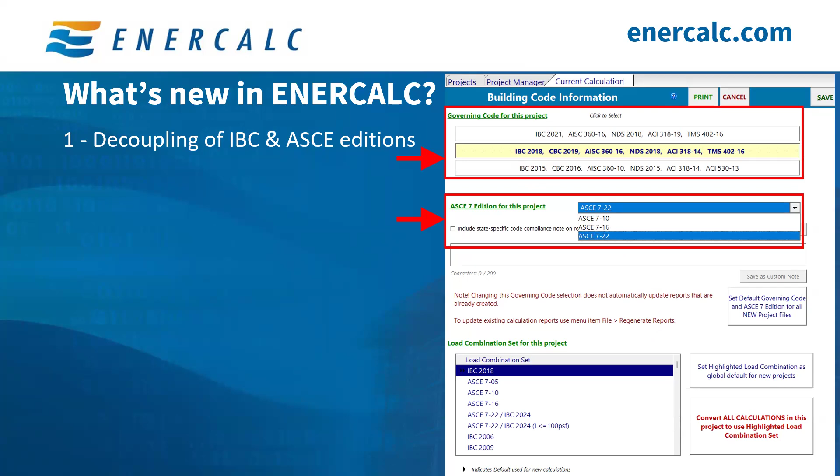The second update is the addition of the new ASCE 7-22 modules. I'm sure y'all have noticed we started with adding 3 new tabs to the calculation menu. The first tab is the seismic loads tab, where we added calculation modules for seismic base shear, seismic wall anchorage, and seismic demand on non-structural components.

The next tab is the wind loads tab, and we added a few more modules, which cover the wind load for the envelope procedure based on Chapter 28, directional procedure based on Chapter 27, and we have a wind enclosure calculator. We are actively working on component and cladding per Chapter 30. It's currently in active development, and whenever it's done, it will be housed under the same wind loads tab in this area. Make sure you keep your eye on all the new updates we release.

The last tab we have here is the other loads tab, and currently it houses a live load reduction calculator, and it houses the snow loads that came out about a month and a half or 2 months ago - that's the ASCE 7-22 snow load module.

Another exciting update is native load linking within ENERCALC. For a few months now, we've had load linking, which gives the user the ability to automatically link reactions from one calculation to another, and change something in one member and have the effects trickle down to all downstream members. This was one of our most requested features from our users, and we're excited to say we support it for wood beams, and it's ready for you to use.

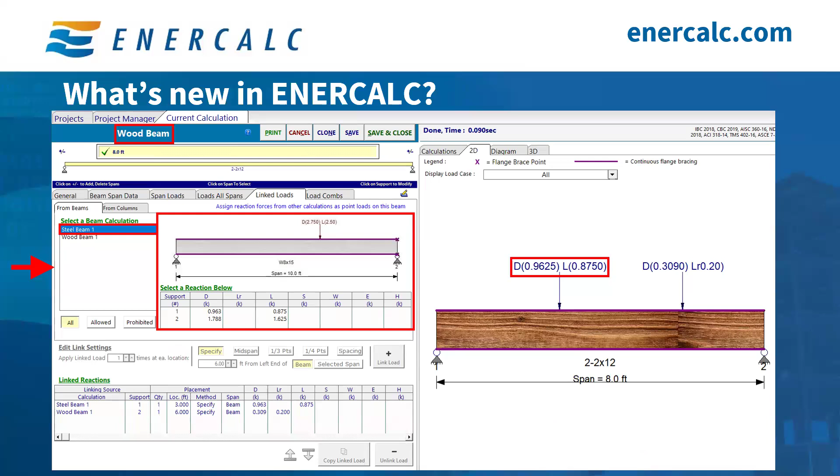The user still has all of the same capabilities in terms of linked load or linked reactions placement. You can grab whatever load you want and put it at a specific location, or maybe at mid-span or third points.

All of the various options that were available in the steel beam are also available in the wood beam. The standard load linking features are still functional after wood beam integration. We still have the calc order, and now it looks into steel beams and wood beams and figures out the exact load path, and it follows that load path properly, so there's no issues with the load path logic, and all calculations are performed in the load path order.

At the bottom, you can still see the load linking status badges. These apply as well to steel beams and wood beams. So this way you'll know if anything changes, it'll turn from green to yellow or maybe from green to red based on the type of change and the type of warning status or information we're trying to convey.

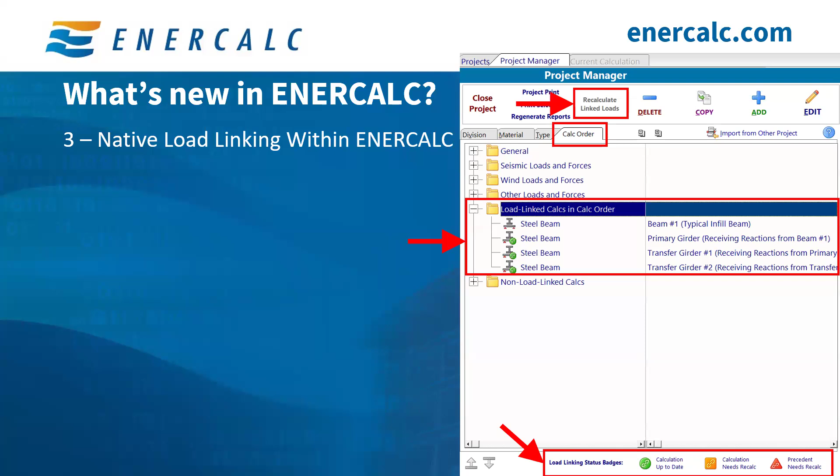And of course, at the very top, you'll still find the Recalculate Linked Loads button, which allows you to bulk recalculate all of your calculations at once to ensure that the most up-to-date reactions are being used and their effects are trickling down to all of the downstream members.

Overall, load linking is an even more powerful tool now than it was before with just steel beams. It allows our engineers to create a well-connected chain of calculations to minimize the risk of transcription errors. And now that we support wood beams in addition to steel beams, with more to come, the sky's the limit.

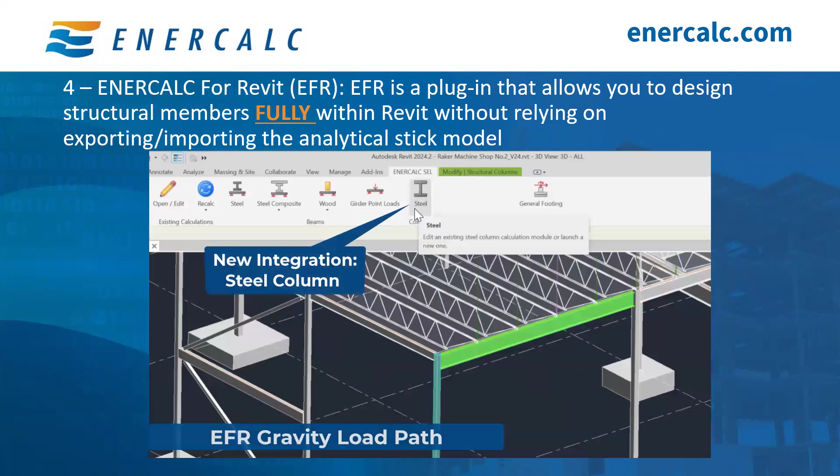The last item we want to highlight before we get into our 2D frame module is our ENERCALC for Revit. ENERCALC for Revit is a Revit plugin that allows you to design structural members fully within Revit without having to export information to another calculation software. It's really a simple point-and-click workflow that allows you to design a member in a fraction of the time it would take otherwise.

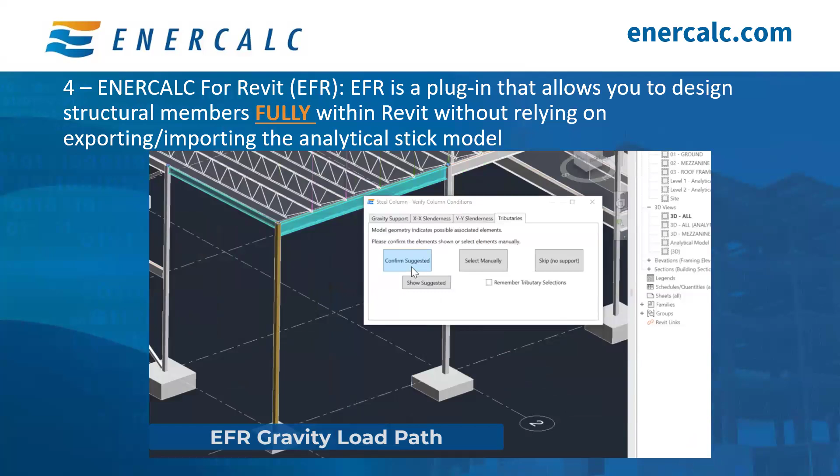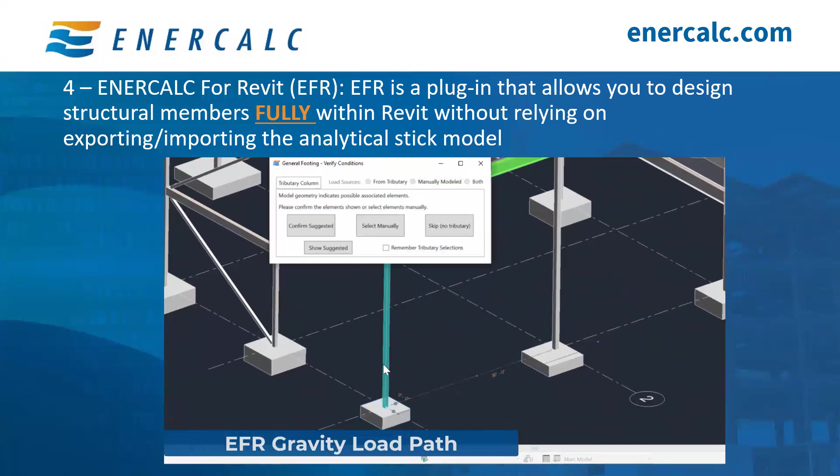You just click on the member and follow the guided prompts that we have there, and before you know it, you have wrapped up your design and you're done with it. It's really that easy. And the same process, because a lot of people ask this question, is not just for framing members, but also for foundations. All you have to do is point and click, and a foundation calculation will be generated automatically for you with all of the load takedown from the columns and all the framing members.

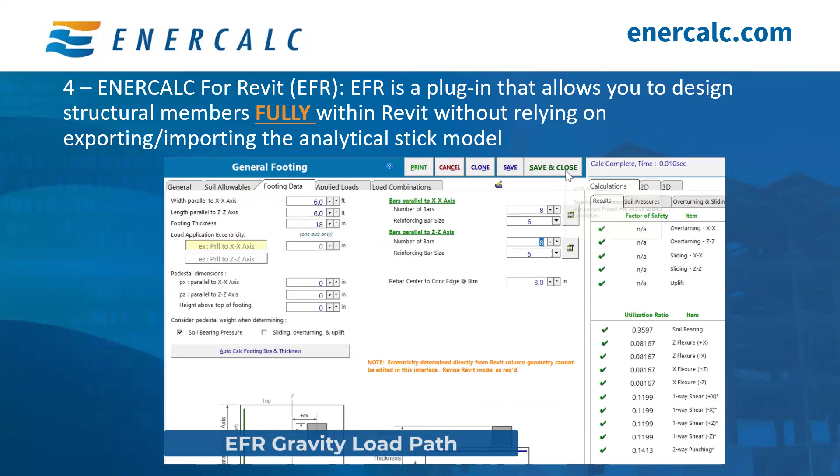Currently EFR supports the design of steel beams, composite beams, wood beams, steel columns, and foundations, so you now have a full gravity load path, with more integrations to come.

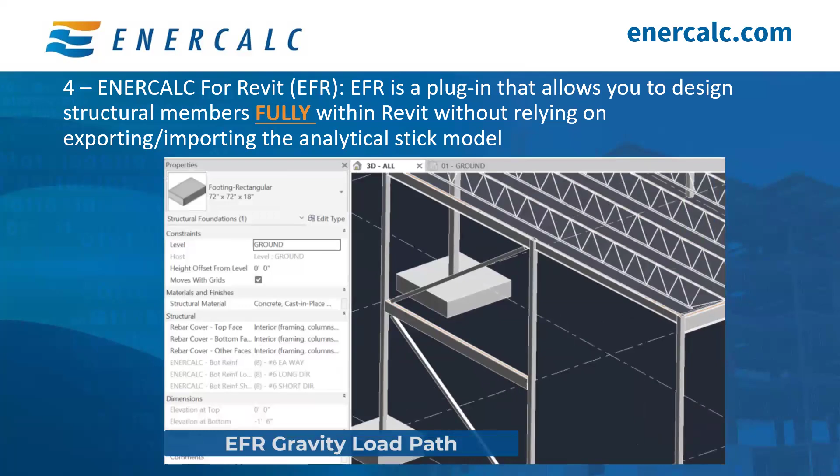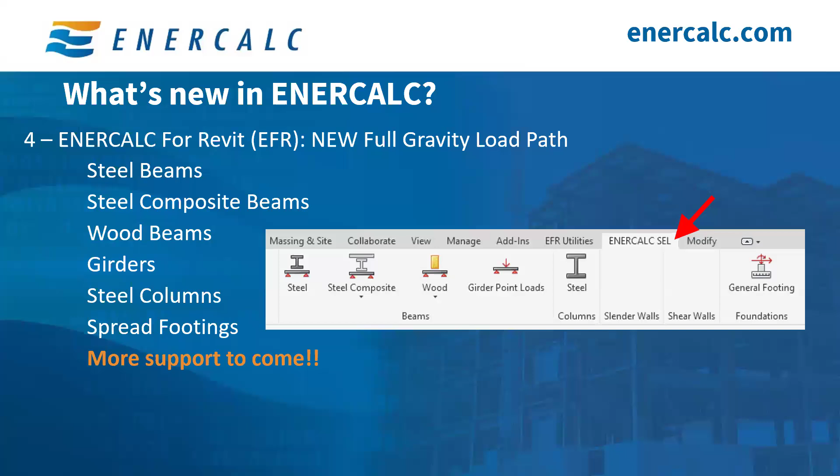Once you have the ENERCALC for Revit plugin installed, it will appear inside of your Revit ribbon bar, just like any native Revit option. ENERCALC is an authorized Autodesk developer, so EFR is designed to play nice and interop with Revit. That contributes significantly to the dynamic and seamless integration between the two products because they communicate back and forth in real time instead of relying on outdated methods of manually exporting and importing analytical stick models.

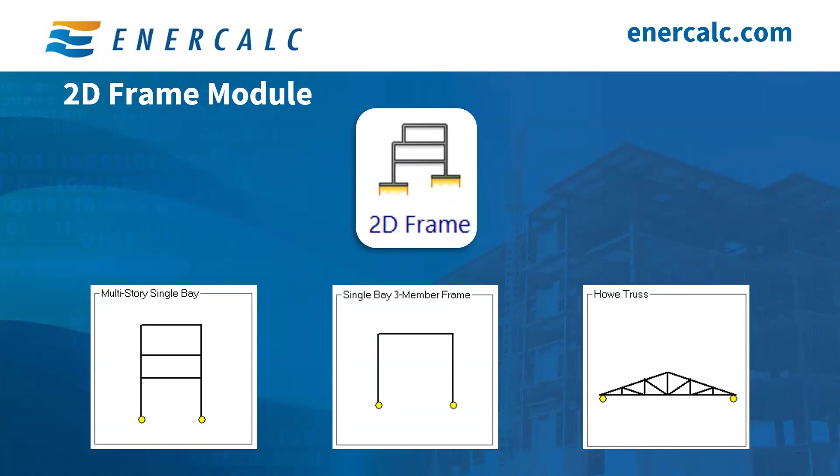So moving on, the focus of our session today is the design of 2D frames in ENERCALC. This includes a variety of planar frames such as trusses, single-story or multi-story frames. Many buildings do not require full 3D design and analysis, and this 2D frame module is a very useful and powerful tool for ENERCALC users to analyze trusses, or the one-off moment frames or knee brace frames they might have, where they don't need to model a full building but still want robust analysis and design capabilities for a lateral system or a uniquely shaped truss. So here's a quick overview of the capabilities and features of the 2D frame.

It performs analysis and design of steel and wood members. It has a frame wizard that helps you with the initial setup of your frame or truss geometry. You get full control over joints as well as member end fixity conditions. You can apply loads to members as well as joints. There are dynamic 2D sketches that respond to the member or joint selected, so if you select a joint it will light up, or if you select a member it will light up in the model, creating a dynamic visual correlation between what you see and what you're clicking on.

Results are extensive. You get a variety of things, but the one I want to highlight is joint displacement, member forces, and stress checks. You also get axial, shear, moment, and deflection diagrams for each member, and 2D sketches displaying deformed and undeformed structures for visual checks.

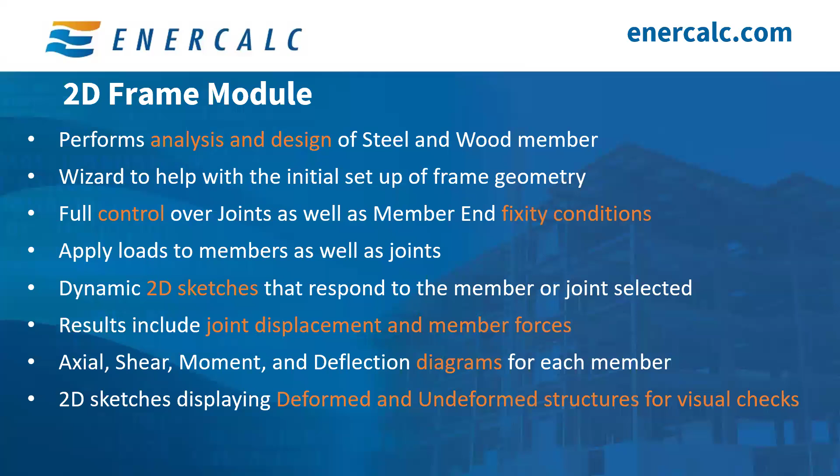So we're going to do a simple example of a moment frame and work our way through it to give you a good idea of what we're working with. In today's example, and this is a very common thing that engineers design, especially whether it's a wood building that has a lot of glass and you need to fortify it with some sort of moment frame, or even a regular steel building, we get these all the time.

So we want to design a moment frame that is 15 feet tall and 10 feet wide. We're planning on using an 8x8 column and a W14 by 22 beam. The base is pinned, and the beam to column connections are fixed. So it's a moment frame pinned at the bottom and fixed at the top. We have a lateral point load on the frame of 7 kips, ultimate, and a gravity load on the beam of 200 PLF. We're trying to keep this simple, but you can do a lot more than what we're doing here. This would just be a simple example that we can dissect and dive into.

To start a new 2D frame calculation, we follow the same familiar process to start any module. You click on the Add button, then click on the Analysis tab, and finally jump to the 2D frame. What's unique about this is that once you click on it, ENERCALC will ask you if you want to use the frame wizard. If you don't have to use the frame wizard, if you click no, you'll just have a clean module where you'll have to draw everything from scratch, including your joints first and the connecting members.

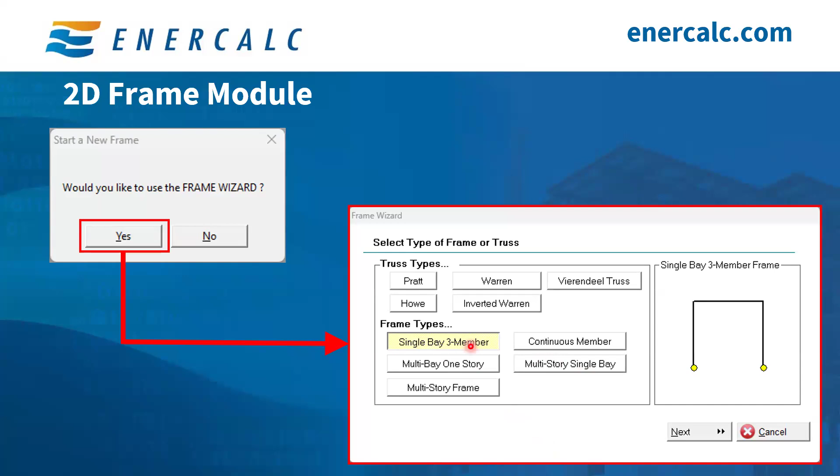That's one story and a single bay moment frame. Again, you can pick whatever you want from here. So for us, we'll just pick this and then click on next.

In this window, we set the frame geometry. So we input the horizontal length, which is 10 feet from our example, and we put the frame height, which is 15 feet. Moving on, this is very intuitive.

We pick the member sizes that we want to use. You have here the steel library and the wood library. For us, we just click on this right here, and that pulls up the AISC section library. We pick the 8x8 by 3/8, and then we do the same thing here where we pick the W14 by 22. If you picked on wood, then of course you'll get the NDS wood section library, 2x4s and all the various things that you can use.

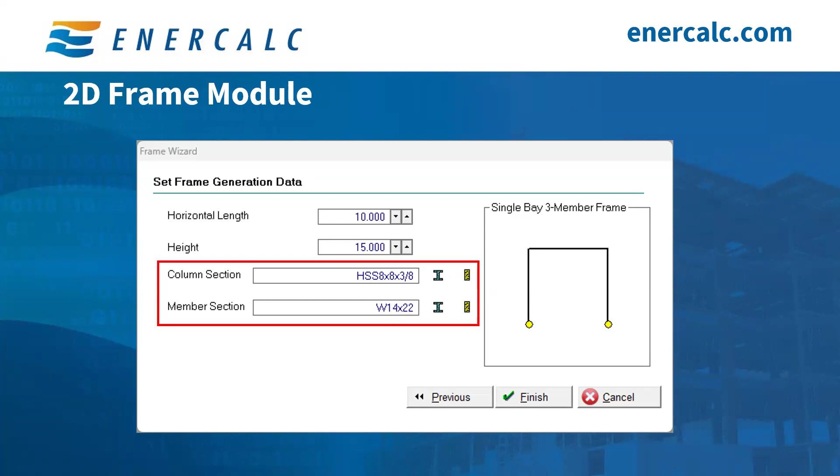That's typically something that I would do if I'm working on a truss, but not for typical moment frames that would be steel. Anyways, once you're done with all of this, you click on finish.

And the frame wizard will take, I don't know, 10 to 15 seconds to just auto-generate the frame for you so you can get started.

So the layout of this module is slightly different. You can see we have a lot of buttons on the left, on the top here, a lot of tabs, more than what we're normally accustomed to in the other modules. Because of the versatility and all of the options and results that you get, we had to jam pack it a little bit with tabs, but it's a very simple process to go through it from left to right.

Starting with the general tab, that's the easiest place to start always. You have right here the description, so we'll just put 2D moment frame. And I'm saying here that it's pinned at the base, because that's what we want to do.

Next, you get a summary. This is something that I typically look at the very end. It's a summary about your current frame. It tells you the total number of joints, total number of members, how many joint loads are applied, how many member loads are applied, and all that. So this is more of something you look at the very end, when you want to get some overall information about your frame. That would be the place to do it.

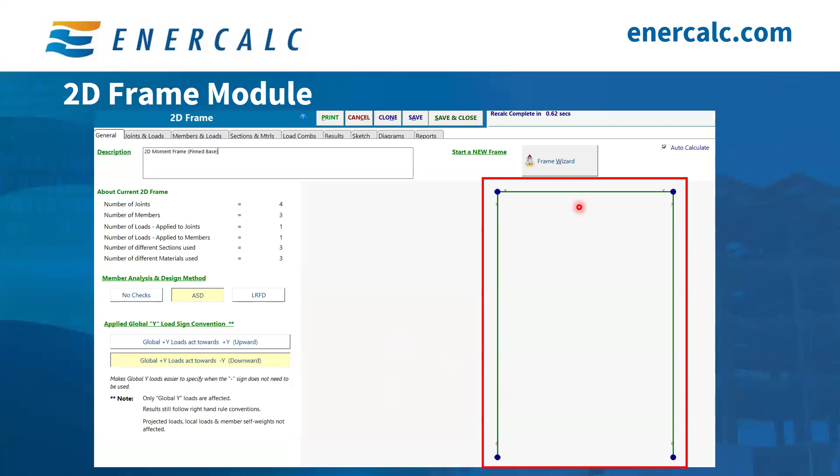That's all there is to it. So anyways, I picked this option right here, which is very intuitive. On the right-hand side, we get this sketch stick frame to help us visualize what we modeled so far, which makes sense. That's all we need is just these three sticks.

So moving on to joints and loads. Under this tab, we have three other subtabs: joint data, joint loads, and joint results. So we start with the joint data. You can see on the left, we have all of the 4 joints and their X and Y locations. That would be right here, all of your 4 joints, and that's all their locations.

You can order these joints however you want. Currently, I have them ordered based on the label, so the joint label is 1, 2, 3, 4. If you click on X or Y or restraint, they will get reordered, whether it's ascending or descending order, based on that. So if you want the X, then they do it based on the X. I like to just keep this simple and keep them ordered based on the joint label. That's the easiest way to go about it for me.

And of course, right here, at any given moment, you always have the ability to model more stuff. If you want an additional joint, you can. If you want an additional member, you can. If you want to delete a particular joint, you can. So there's that capability as you go through the whole process.

Also on the right-hand side, you can see that we have 2 options: joint sketch or full frame sketch. Currently, this is the full frame sketch where I get to see the whole thing, and because I clicked on joint 2, it's highlighted right here. Now, if I click on joint sketch, that's the next option - this is what it's going to look like. It will just show me that joint by itself, and it will only show the members framing into it, with a label. So member A frames into it, member B frames into it, and it doesn't show me anything else. I like to see the whole thing.

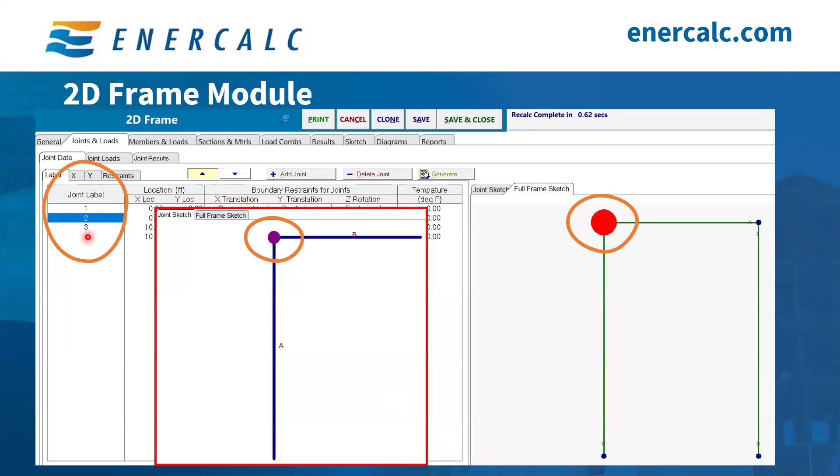It's important to note that in both sketches, the joint that is selected is overly exaggerated to make sure that the user can easily identify that joint. So we click on joint 2 - this one is already large, and this one is super large. That graphical exaggeration is dynamic. So as you click on maybe joint 3, then this one right here will get exaggerated. If you click on joint 4, then it's this one, and so forth.

Lastly, this is the fun part of today's session: boundary restraints for joints. We need to define boundary restraints for joints, and I like to think of these as an external stability and boundary condition. For example, this frame does not have any external restraints that hold it in place except for the foundations. Everything else it can move - if it needs to move, it will move. Nothing else is preventing it from doing so. The only part that's holding this frame in place right now is this foundation on the right-hand side and the foundation on the left-hand side.

So that will be joint 1 and joint 4. What I will do is pick joint 1 and joint 4, and make them fully restrained. To dive into this a little bit, if you look right here, you have the X translation - that means movement in the X direction. X direction is left and right, that's just the horizontal movement, and that's restrained. The Y direction is up and down, and that's also restrained.

The Z rotation - we recently changed the naming here to say rotation instead of just Z, because ENERCALC already knows this is planar analysis. ENERCALC is not confused, it doesn't think about the third axis. That's already out of the issue right now, out of the process, so that's not something we're worried about. This is not meant to represent a third dimension - instead, this is meant to represent the rotation, whether you have moment restrained there or not.

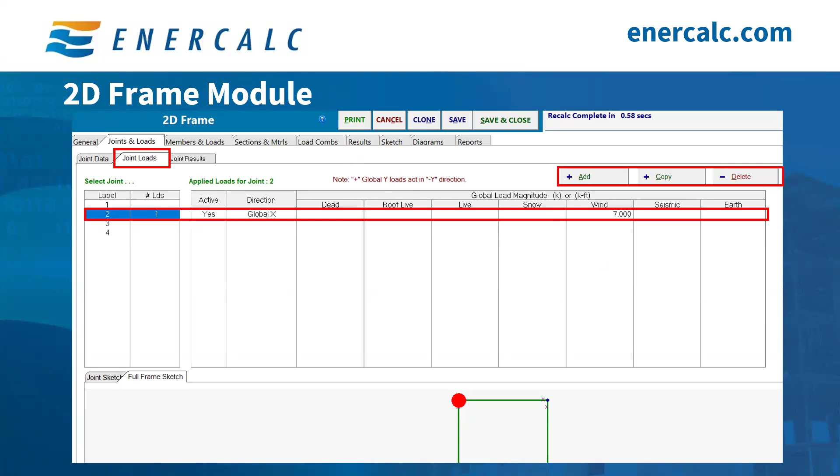Moving on to member loads - it's a similar style. We have member data, member loads, and member forces. This is similar to the joint results; it will have the forces going into each member. So this would be something for us to look into later if we need to.

Starting with member data, you can organize the members based on how you prefer to organize them - that's why we click on these. We're just going to keep them organized based on the member label, and you can see here that they're named A, B, and C.

The bottom right has a dynamic sketch, a dynamic 2D stick frame type of sketch, and if you click on whatever member you want, it will light it up here in orange. So we clicked on member A, then that is member A - this way always making this graphical and visual correlation.

Each member is labeled with the location of the I and J in this middle column. This sketch shows you where joint 1 is and where joint 2 is, and then the table will tell you member A, the I portion is at joint 1 and the J is at joint 2. So we know that the I is down here and the J is up there. This is very critical because now we're about to determine the end member releases, and we want to make sure we understand which end is I and which end is J.

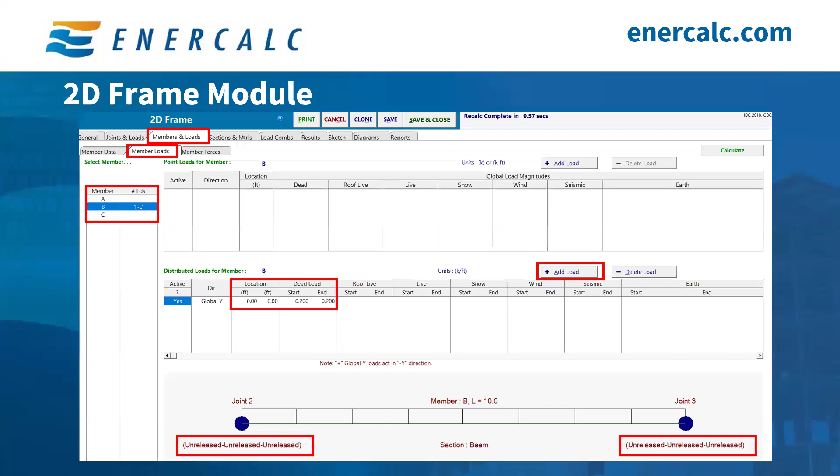And lastly, you can check your member end releases on the sketch. So that's a quick place to review as well. You have the beam member, and this says unreleased on all 3 of them. Again, that's a good place for you to do a triple check that you have the right information.

So moving on to the next tab, that's the sections and materials tab. You can control section data and material data by clicking on the appropriate tab right here. We can start with the section data. Here you can define sections to be used for your design, and of course you can add and delete sections. Currently, we have the HSS 8x8 for columns and W14 for beams.

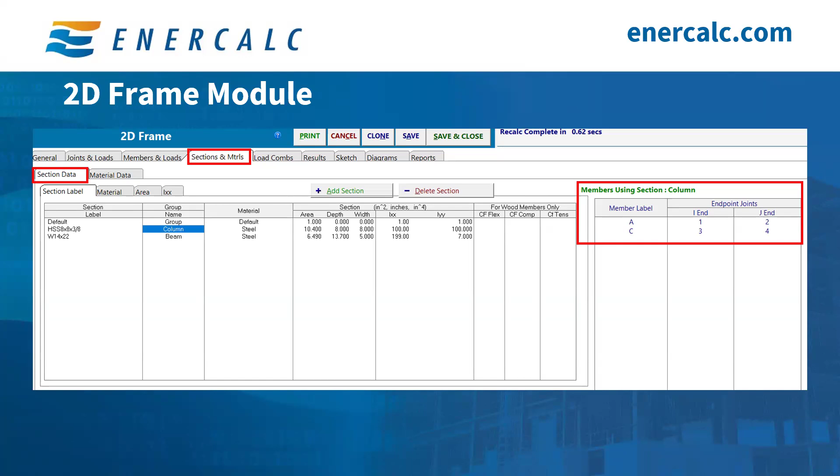If you click on the group name, which is columns for example, this table gets populated with all of the members that belong to that group. That's really handy just to see that everything is done right for you. And if you click on the HSS or the W14, that will open up the AISC library to allow you to change the size if you need to. And of course, you can do this with wood as well, using the NDS library.

The same idea applies at the material data tab. There's steel and wood materials already defined, and you can also add your own general material or delete one as you please. Since wood has different species, you can click on this button and it will take you to the NDS library of materials, so you can choose whatever species you want to use. Additionally, if you click on a particular material, you can see the sections that are associated with it.

So if I click on steel, it automatically tells me, hey, you have these two steel sections. And we can create different steel materials, because this one has an FY of 50. Well, if I have an angle or maybe an HSS, maybe I want a yield strength of 46 or 42, or a pipe maybe 36. So I have the ability to create whatever material I want here and use that based on the member section I'm using and the true FY value of that material.

Once you do all of this, you can jump to the load combinations tab. I won't dive deep into this one since it's a very common tab in almost all of our modules. But the user has a great level of flexibility when it comes to load combinations, and you can control the combinations separately—for strength right here, then for reactions, and for deflection combinations. So you can have these things set up a little differently.

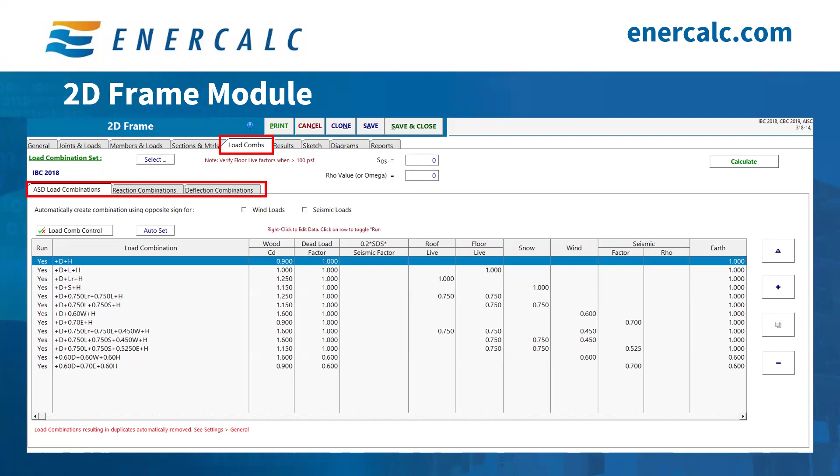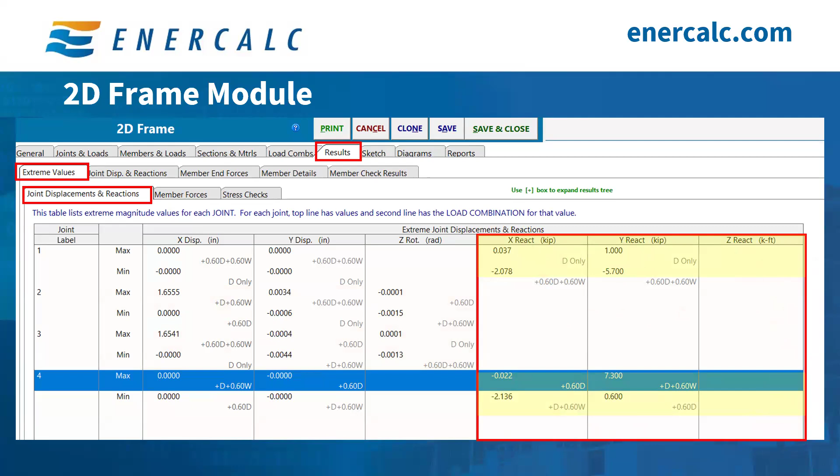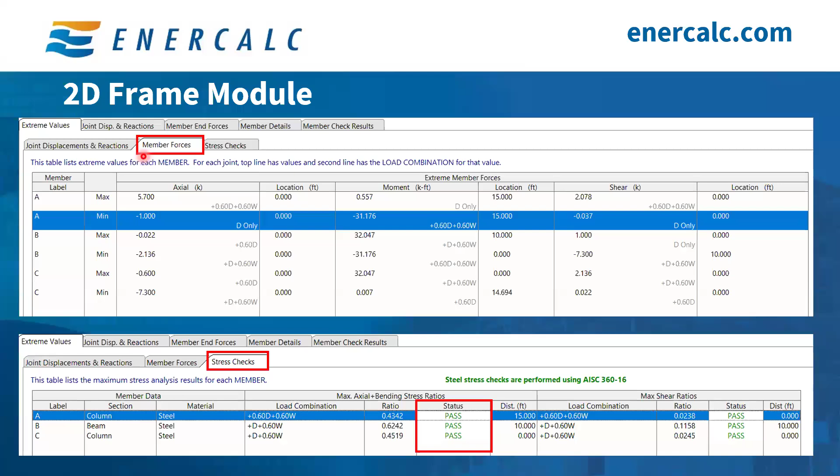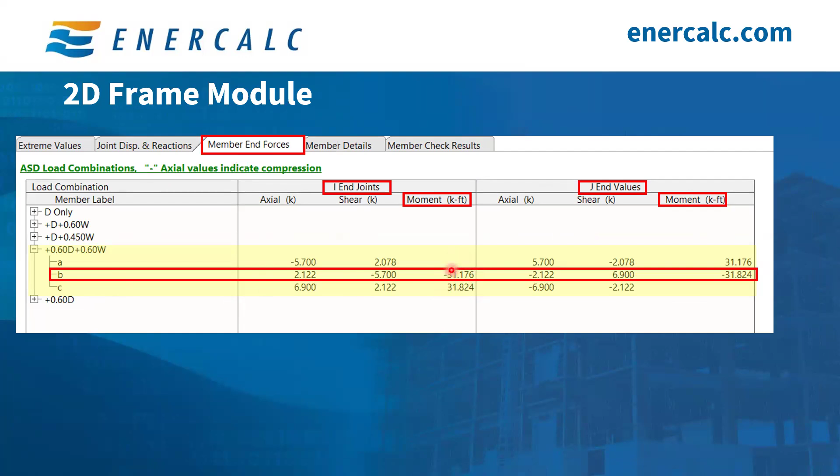So to move on, there's just a lot of information to cover in here, of course. You can click on the extreme values again, member forces, stress checks, and you can see that all of your members are passing, and you can get a lot of incremental results. For a lot of us, whether you're designing your own connections or delegating connections, you can click on the member end forces, and you can see here the moment that's going from the beam to the column and from the column to the beam. So this way you can design those connections properly.

The last couple of things I want to go over is under the sketch tab, where you can see the undeformed and deformed shapes. You can click on whichever load combination you want, and in our case we want to pick the deflection load combination. That's this one right here. And you can see the deflected shape, and it's clear that the base is pinned. There's no questions about that.

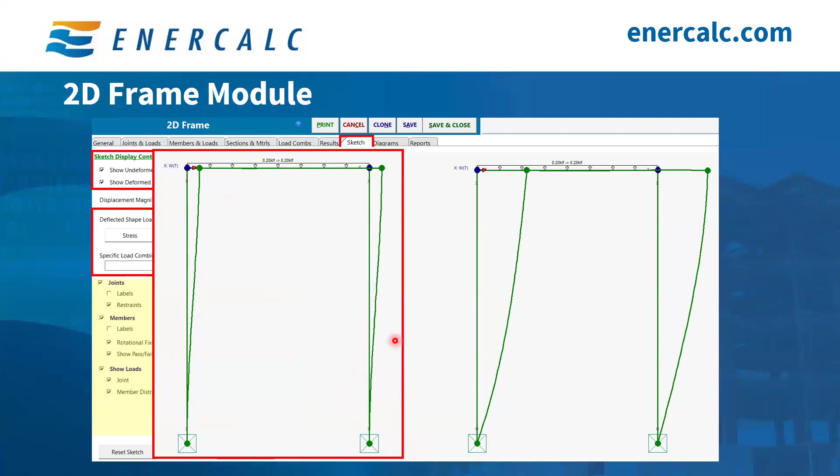So at least we have a good visual confirmation that we are comfortable with. This is just another thing I did on my own, where it's a fixed base, and that's actually what it looks like, which makes sense. And of course, you get less lateral displacement at the top.

And of course, another great assessment tool is the diagrams. So you get axial, moment, shear, and deflection diagrams for each member that you have in your project or in your frame, and then you pick whatever load combination you want. And you can get the stress, you can get deflection, reactions. That's for the combination, whichever you would like to use.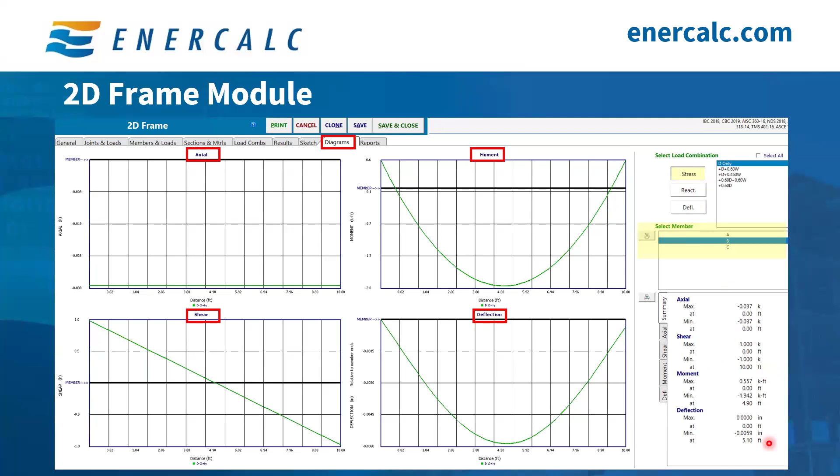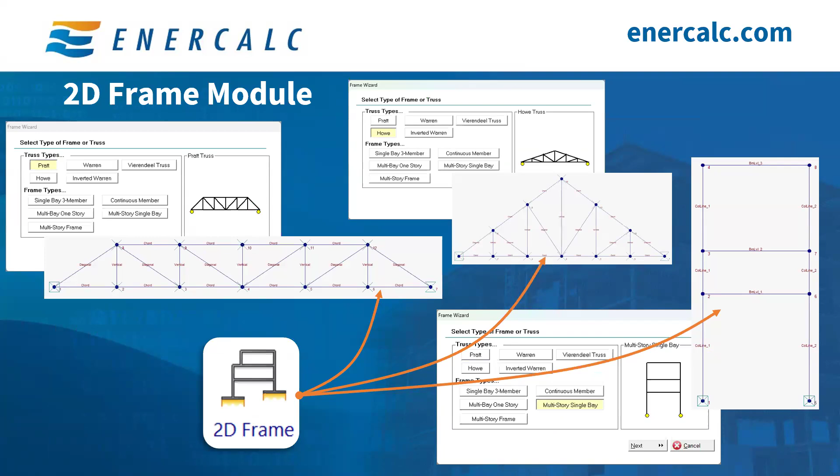So overall, the 2D frame module is a powerful tool that allows the users to analyze and design frames and trusses. It provides a great level of flexibility in terms of modeling, and of course, it displays a breadth of granular results for you to be confident in your design.

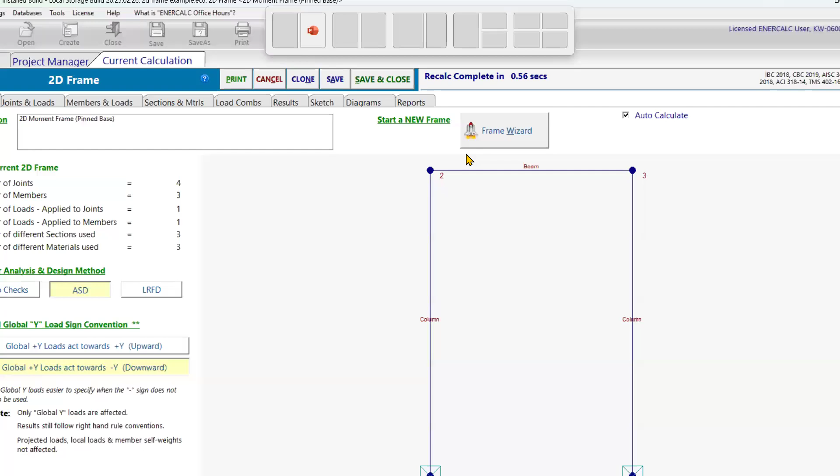Next question. For joint loads applied in the example, can we apply the point load in the form of a member load instead of for the lateral load? So the question is fundamentally about applying a point load on a member rather than on a joint.

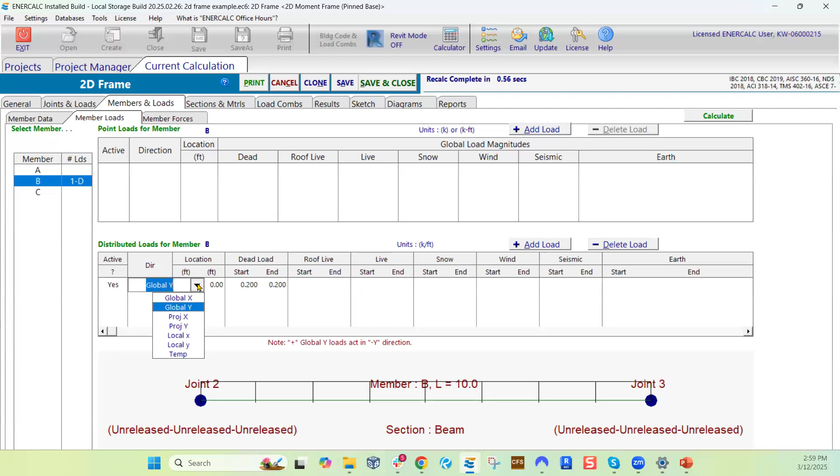Correct. So I showed you how to apply loads on a joint earlier, but this right here is member loads. If you click on member loads - I don't know if you remember earlier from my example - we applied this as a dead load in the global Y direction. You can actually apply it in the global X direction, and that will make it a horizontal load.

So for example, this is our member right here, and we can add a quick load. I want to apply it global X, let's say it's the whole thing, and I'm going to put 0.02. So yes, the answer to the question is that you can absolutely apply that load as a member load and apply it horizontally. It doesn't have to be a point load on a joint.

Question from Lutfi. When using the module for wood truss design and analysis, will the module design truss members based on the NDS?

This is a capability we have both for AISC and for NDS, but go ahead Mac if you want to elaborate. I don't do a lot of wood, so that wouldn't be my place, but I know there are particular checks that might or might not take place. If you're working on a wood truss and something prompted the question, please send it to the support team to check it out. But typically it should design everything just fine. If there's anything you want us to look into, we can.

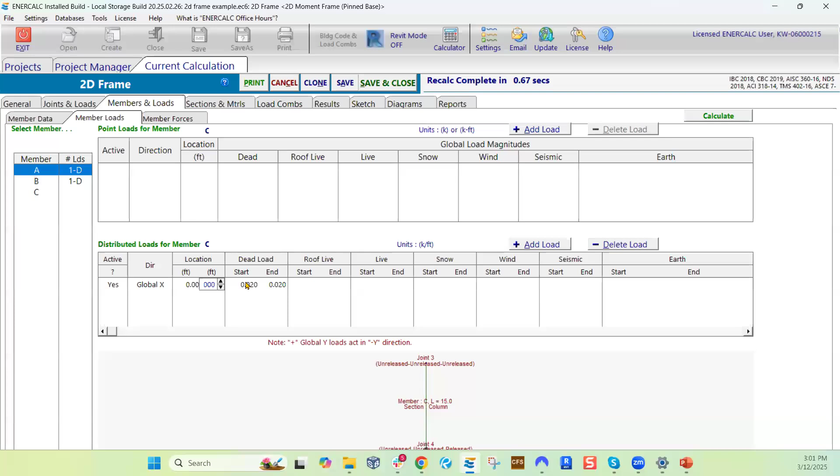Can you revisit the unbraced length structural properties where you were setting unbraced length? We missed that about unbraced length structural properties.

That probably has to do with the actual code check analysis being performed. As you put your information here for members, you get here your unbraced lengths. You can just put whatever you want here and pick your slenderness ratios, or you can have ENERCALC auto-calculate your KX values based on the end fixities we've already determined in our release and unreleased conditions. As far as the unbraced length, it's just the unbraced length - we're putting LU, LY, and all that information, the full lengths, and then the K factors can be one for all of them or auto-calculated.

I didn't get to that during my presentation, so I wasn't sure if something I said earlier prompted this question. Can we clearly visualize the directions of global XYZ in the 2D frame? That probably has to do with the overall sketch view.

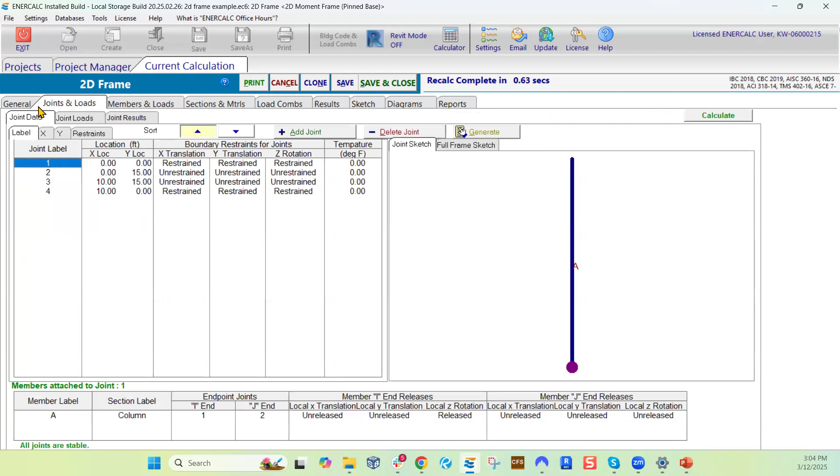Another question here: you started your example using the frame wizard. What different types of frames can the frame wizard actually help you create?

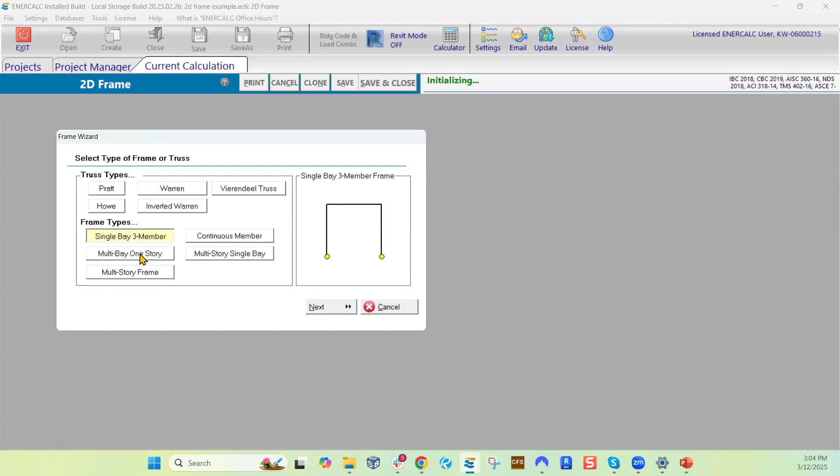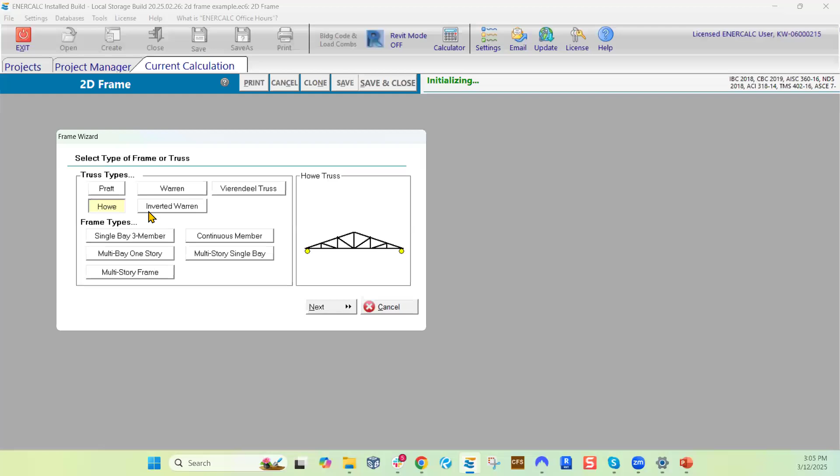As a follow-up, can you also design or create a frame or truss without using the wizard? Yes, absolutely, 100%. That's why it asks you a question in the beginning: do you want to use the wizard or not? The wizard doesn't automatically pop up, you have to enable it, or it just asks you. Let me grab this so you can see it.

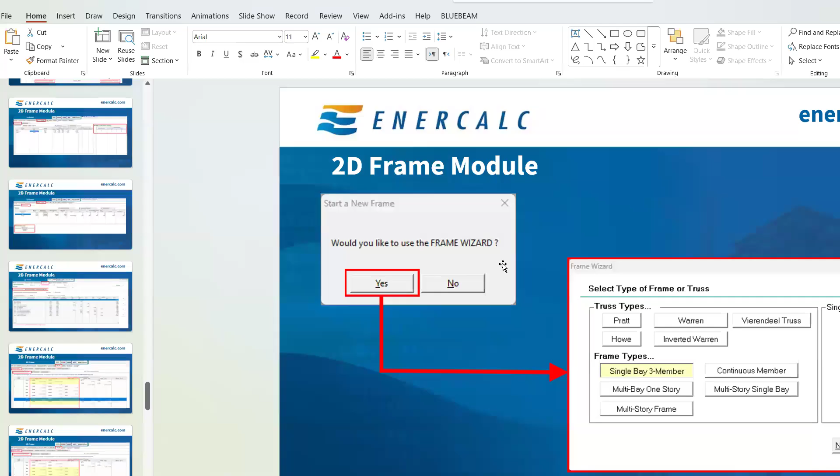Even here from my presentation, you get this question as soon as you click. If you say yes, it takes you to this menu we just looked at. But if you say no, it gives you a clean module with nothing. You'll have to create all your joints from scratch - you have 0 joints, 0 members, you don't have anything.

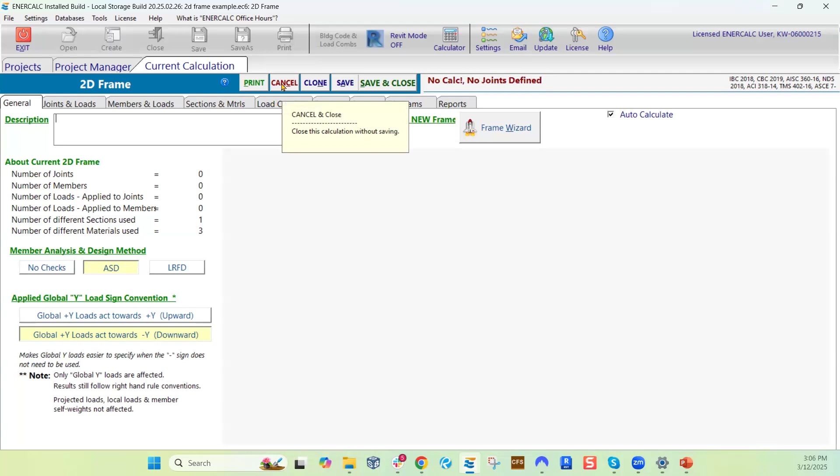Follow-up question on the unbraced length issue you were going through. As Rick was pointing out, Lu-z and Lu-y, the unbraced length, shows -1. What's meant by that, and what effect will it have on the analysis or capacity checks?

That's probably a good question for support because I'm going to have to look into it and see what's going on before I can give a proper answer. The thing is, I need to look into this a little bit more before I give a rash answer.

There was also a question about whether there are any limits or upper bounds on how many members and joints can be modeled.

Yeah, the answer is yes. I don't know the exact number off the top of my head, but we believe it's in the neighborhood of 300 joints. It uses a 2-to-1 ratio of members to joints, so the upper bound is around 300 joints and around 600 members. That's getting to be a pretty large model, so during most typical analysis, you're not going to bump up against that limit.

Another question on that single bay frame you were looking at - is a 4-member frame possible? For example, adding an additional beam at the bottom of the frame, so that would be like a moment frame with a grade beam at the bottom kind of setup.

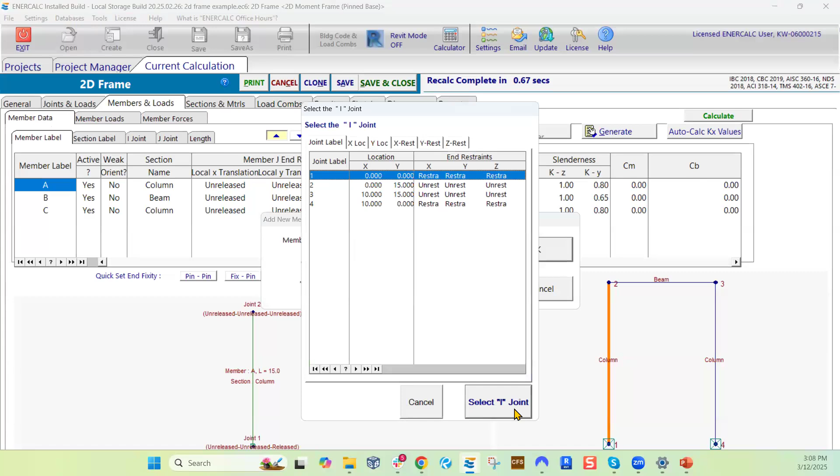That would not be generated by the wizard, but you could still model that by hand - place your restraints at the corners. You see right here it says add member, and you can define which joint you want it to go from, maybe from joint 1 to 4, and call it XY or something, then start working. You'll have to define the materials and some other stuff, but yes, you can add the member. Of course you have some issues to fix because we just added a member - we need to fix the materials and the fixities as well. So the short answer is yes, absolutely you can.

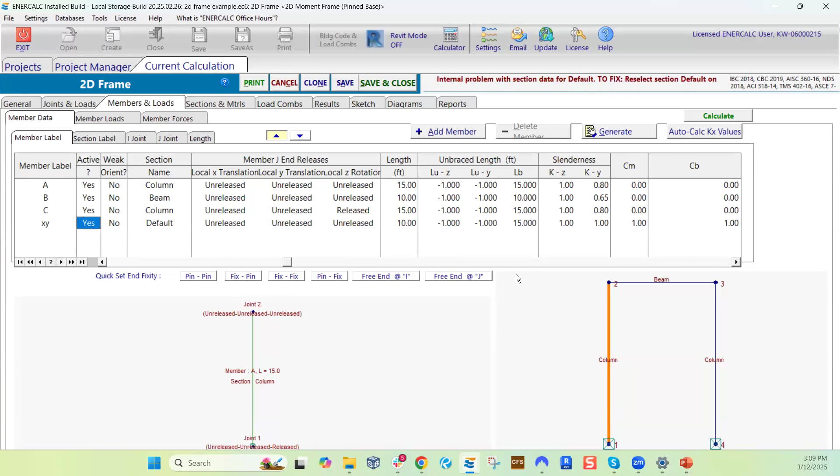Question from Chad: how to add more members with the wizard? The wizard is to shorten your generation process, and then you can use that exact process Mac just went through to add additional members if you need. So when you use the wizard, you're not stuck with that geometry - it's just a quick generation, and then you can go on and modify or extend that geometry in whatever way works well for you.

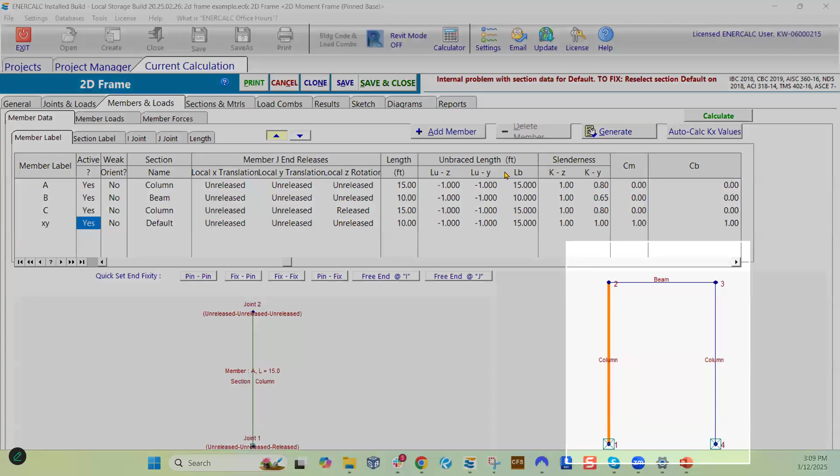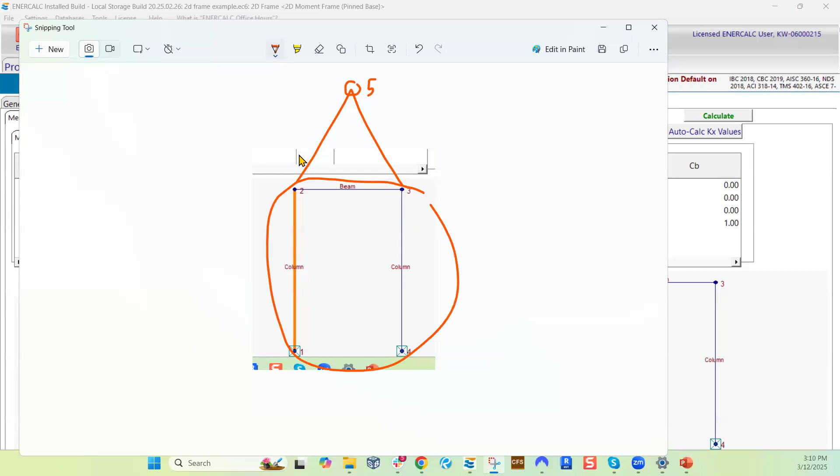Let me give you a good example. I don't know if you can see my sketch, but a good example is if I have a shape like this, instead of doing it all from scratch, I can have the wizard create this, and then later just add this additional node number 5, and then add member ABC, member D, and member E.

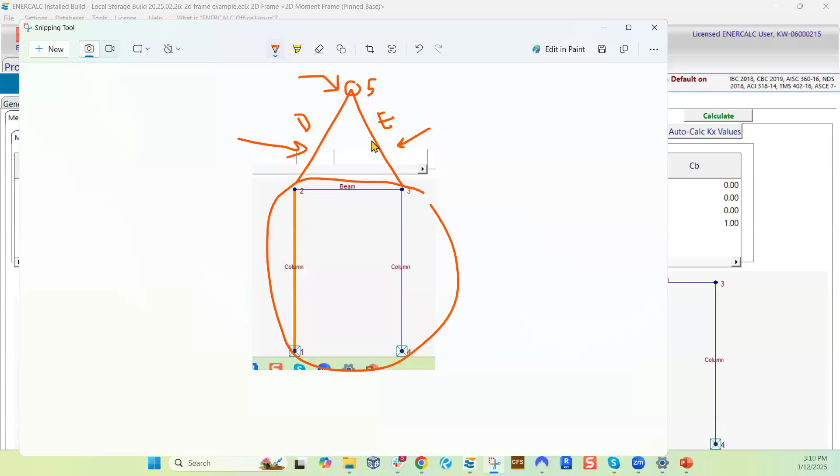Does that make sense, with the add joint, add member workflow? You'll have to add the joint first, then add the members second, because you can't model a member that's not going to a joint in ENERCALC - every member has to go from a joint to another joint. Just to give you an idea, if you want to do something like this, it will require a joint here, here, here, and here - you can't just do 3 joints and call it good, you'd have to put a fourth one.

But yeah, it can just help you do some of your work and then you can add more to it.